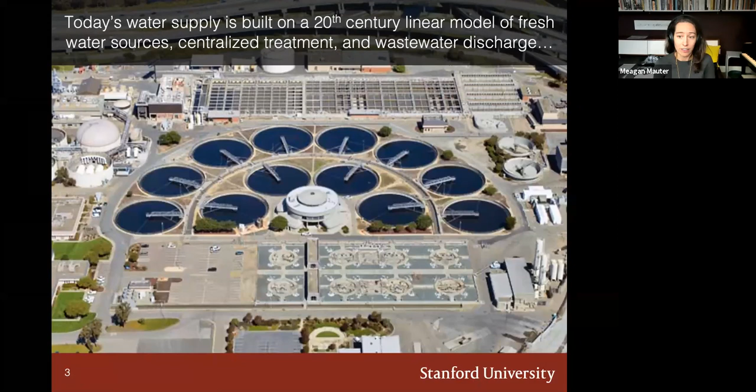Today's water supply is built on a 20th century linear model: accessing fresh water sources, large centralized treatment facilities leveraging economies of scale, and discharging wastewater with limited regulations and oversight. This model doesn't hold for the 21st century—we have large changes in precipitation patterns, increased water demand especially in urban environments, aging urban water infrastructure needing upgrading and replacement, and increasingly stringent regulatory limits on discharge. All of these factors are forcing water users toward non-traditional water sources and treatment methods.

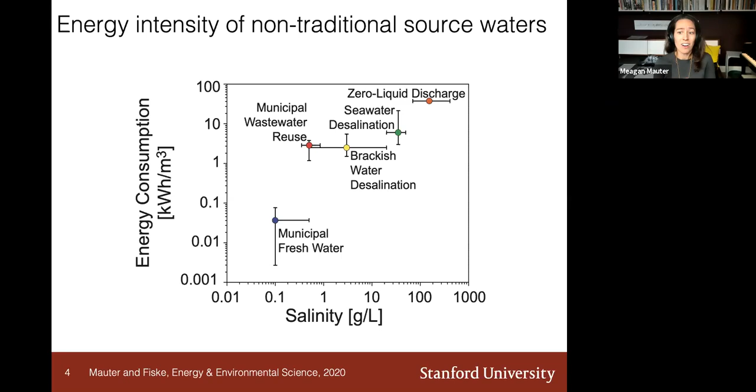Because water users are looking for low-cost sources, they tend to prefer sources with lower energy intensities of treatment—that is, lower salinity waters. So when augmenting municipal freshwater sources, we tend to see investments in municipal water reuse and brackish water desalination. But what's interesting is that municipal wastewater reuse and brackish water desalination are actually far less thermodynamically efficient than our processes for treating seawater.

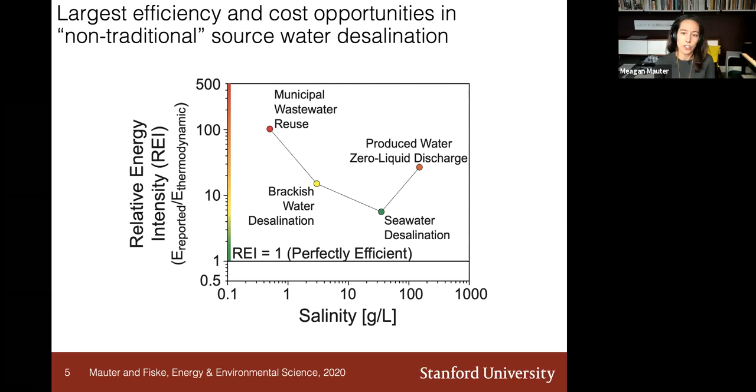We can replot these same sources with respect to their relative energy intensity of treatment—that is, energy intensity relative to the thermodynamic limit of treatment. What you see is that seawater desalination is actually one of the most efficient industrial separation processes, whereas there's a large opportunity for innovation in other non-traditional source water desalination at lower and higher salinity ranges. So NAWI's mission is to help water users cost-effectively tap these non-traditional sources, both by pursuing new sources like inland brackish water and by facilitating water reuse.

Ultimately, we seek to develop technologies that enable 90% of non-traditional water sources to achieve pipe parity. Translating this mission into an R&D portfolio really begins and ends with how we define and measure pipe parity. I want to dig into pipe parity for the water space a little more deeply here.

When we talk about pipe parity, the academic research community almost entirely focuses on the energy intensity of treatment—that's what I just presented to you. But the industrial research community, and quite frankly water users, are often far more focused on cost. So metrics for assessing cost become really important, especially for emerging technologies.

In our baselining activities preparing for the hub, and in our first year of activity, we also heard about the role of other pipe parity metrics and drivers for water reuse—things like regulatory discharge, or softer value propositions like drought resilience that a seawater desalination facility would provide to a city, or sustainability certifications an industrial manufacturer might realize by implementing water recycling on site. What we found is that there are often a large number of different determining factors, each of which affect a user's willingness to pay a premium for non-traditional water reuse.

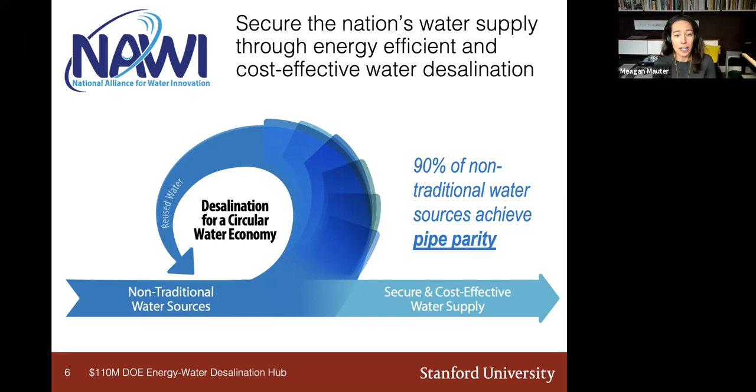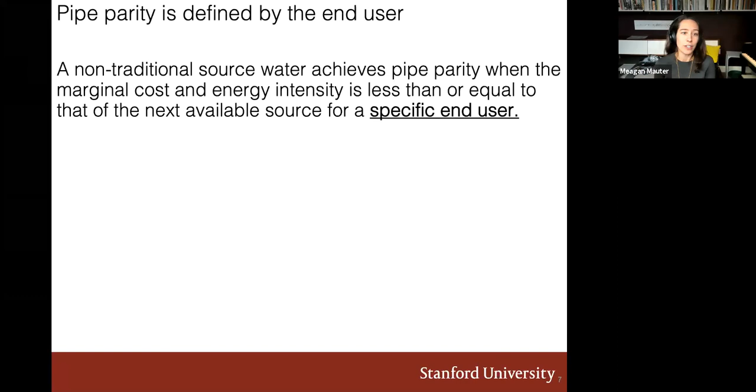Let me make this more concrete by offering up a definition for pipe parity. Of course, I'm going to start by saying pipe parity is defined by the end user. Our working definition acknowledges this reality by saying a non-traditional source water achieves pipe parity when the marginal cost and energy intensity, or other metrics, are less than or equal to the next available source for a specific end user.

We've looked at a lot of different end users in NAWI's baselining and road mapping activities during year one, including the power sector, the resource extraction sector, the industrial sector, the municipal sector, and the agricultural sector. We will also be highlighting in our road mapping and baselining activities the degree to which this is really geographically defined.

We see a lot of variation, and I think it's fun to be here in the Third Coast seminar series because so much of the desalination focus has actually been inland in the West, in places like California, Arizona, and New Mexico—arid, desert regions. But it's equally applicable in other geographic areas where we might not think about being short on water supply, but we see other drivers encouraging water reuse. I will say that across these water users, there is actually a common set of technical barriers to cost-effectively tapping those non-traditional water supplies.

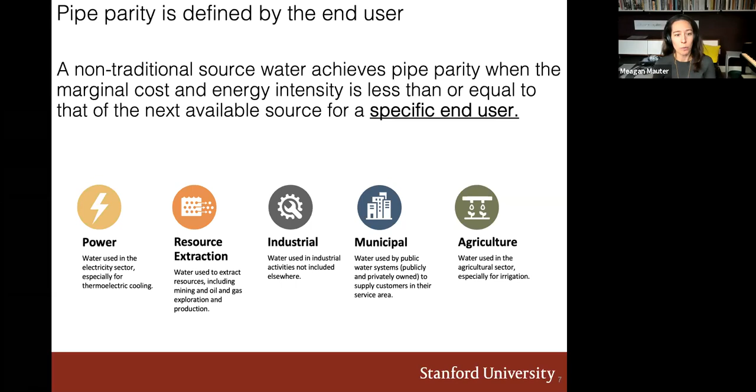I'll come back to what those technical barriers are in just a second. The other important definitional aspect to pipe parity is that it must be defined on the margin, which means it is defined instantaneously and in a location-specific manner.

A non-traditional source water like wastewater is never going to have the same cost or energy intensity as fresh surface water—we know that. But for a municipality like Orange County that needs to augment limited supply, wastewater reuse may very well be the next lowest cost source. So on the margin, it is cost competitive.

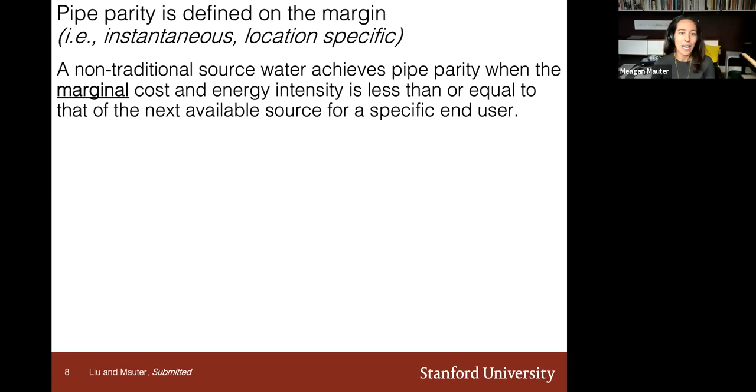Determining what this next lowest cost source is also means we need to look beyond just treatment to consider the full life cycle cost of water. We've done a lot of work in our group to look at the energy embedded in water transmission—conveying water from the source to the treatment facility—understanding the energy intensity of treatment with high resolution, and then also quantifying the energy intensity of distributing water from the treatment facility to the consumer.

In one example, we've looked at a network of 330 different consumer nodes and quantified the relative energy intensity of this entire process, moving from the source to the consumer for each of these water users. We observed three things in doing this. The first is that there's a wide range of energy intensity for delivering water to different consumers.

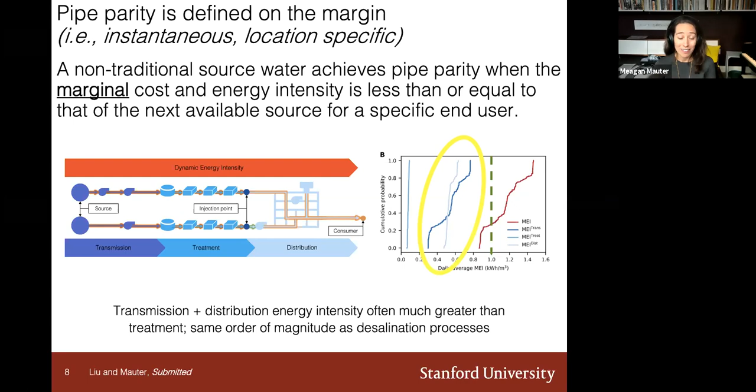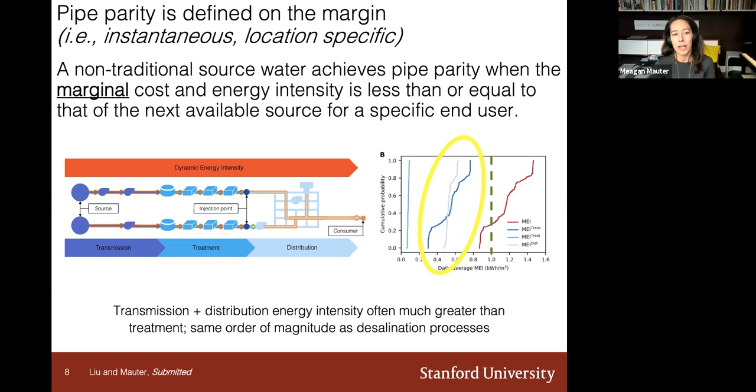The third takeaway here is that transmission and distribution energy intensity are often much greater than the energy intensity of treatment for overall municipal systems. They happen to be on the same order of magnitude as these desalination processes I just mentioned. This really underscores the fact that there are large opportunities to think differently about the way we might augment future water supplies.

In NAWI, we really relied on this quantification work to inform hypotheses about the relationships between treatment costs, transport costs, and total costs when defining the levelized cost of water. Our initial hypothesis was that the most viable pathway for reducing the cost of non-traditional water sources would be to replace the economies of scale we tend to see in water treatment, where we see much lower cost water treatment at higher operational scales.

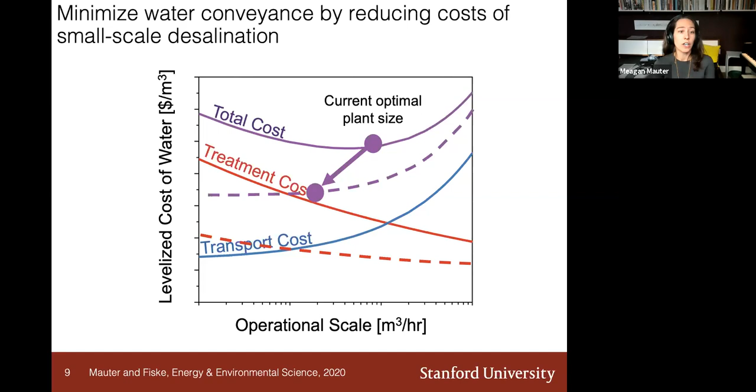We wanted to replace that with economies of scale in manufacturing, essentially lowering the cost of small scale distributed treatment systems through manufacturing innovations, and that this would reduce the overall cost of water by basically minimizing or eliminating the cost of water transport. So this is kind of our grand vision for NAWI, and one of the next steps was really to define what the technical needs were to realize these small scale distributed systems.

We identified 6 different technical needs that we thought were going to be critical. The first is autonomous operation, so an ability to operate these small scale systems without as many on-site operators, and also to leverage advanced models to help us work in a more efficient, both thermodynamically efficient and cost-efficient manner.

The second innovation need is in precision separations. We want to be able to remove contaminants of concern without over-treating the water. Most of the time, this involves trying to move away from bulk separation processes when a trace contaminant is what's driving that particular separations need.

The third area is a need for resilient treatment systems. In particular, in small scale systems, we expect to see much greater fluctuation in water quality. So we're going to need systems that can really respond to this fluctuation without failing, without fouling, without scaling, et cetera.

The fourth area is intensified brine management. I'm going to spend a lot of time on this in today's seminar, but essentially brine or concentrate management from desalination systems is often a real limiting factor in our ability to deploy inland water desal, and so is going to be very important as we move forward with this paradigm.

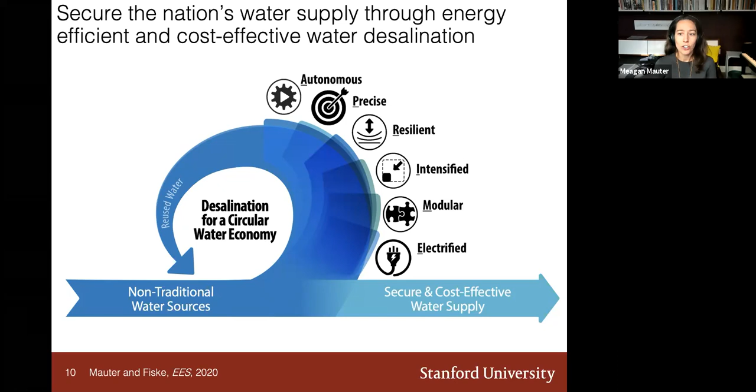The fifth area is modular, really leveraging these economies of scale in manufacturing to reduce the costs of both pretreatment and desalination systems. And then finally, process electrification, moving away from chemically intensive processes that are difficult to stock and store on site to electrically driven processes, and also using water treatment systems themselves to provide services back to the electricity grid.

So across these 6 challenge areas, we're able to distill this kind of set of core research needs that would benefit all of the 5 water user groups that I previously mentioned.

But I'll also say that as a funding organization, we're also facing a larger and slightly more existential question about how to distill some of these challenge area questions down to very specific innovation needs that are going to most quickly deliver lower cost desalination systems.

I'll say this is really a universal challenge. It's a challenge for academic researchers looking for new R&D projects. It's a challenge for industrial component manufacturers trying to stay competitive in their marketplaces. And it's a challenge for municipalities trying to figure out when it's worth adopting a new technology platform or when it's worth waiting a little bit longer to see what comes out next.

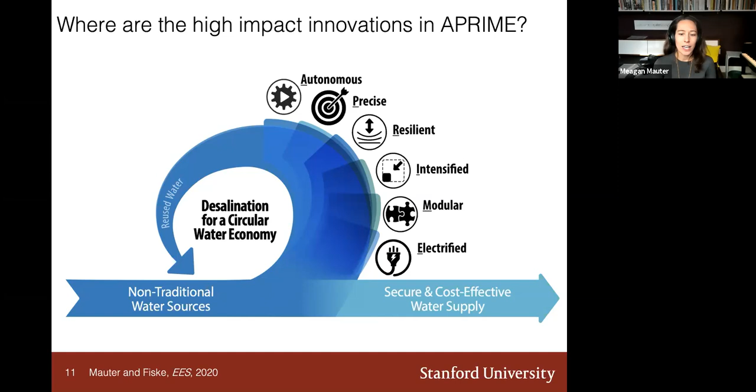The reality is that as a community, as a water community especially, we really lack good tools for evaluating the value of innovation. So today's talk is going to focus on a suite of approaches we've been developing in my group and alongside my group within NAWI to really look at this universal question. I'm going to do this by using intensified brine management as a model.

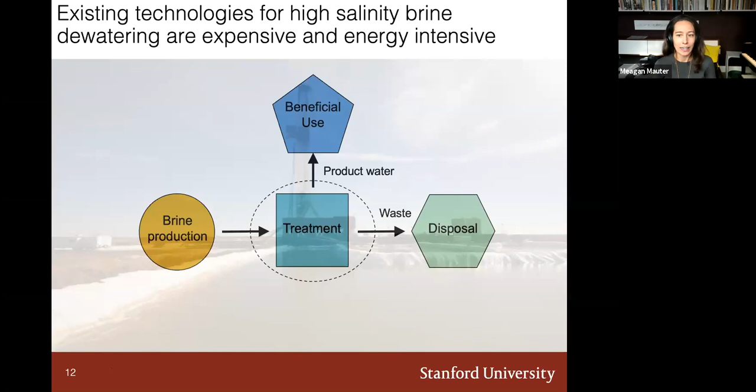So we start with a high level problem, which is that we don't end up recovering much product water from brines because existing technologies for high salinity brine dewatering are expensive and energy intensive. And so as a result, we incur very, very high disposal costs.

The next step is really to figure out what are the technologies used today and why are they so expensive. So we can start with this baselining question of trying to understand what is the cost and energy intensity of reverse osmosis, which is the state-of-the-art technology for concentrating brines up to about 75 grams per liter, and mechanical vapor compression, which is the most energy efficient thermal approach for desalination of high salinity brines at this higher salinity from about 75 up to about 250 grams per liter TDS.

So what we find right off the bat is that while reverse osmosis is incredibly energy efficient, mechanical vapor compression, because it involves the first order phase transition, uses 5 to 10 times more energy and is 3 to 10 times more expensive than seawater reverse osmosis.

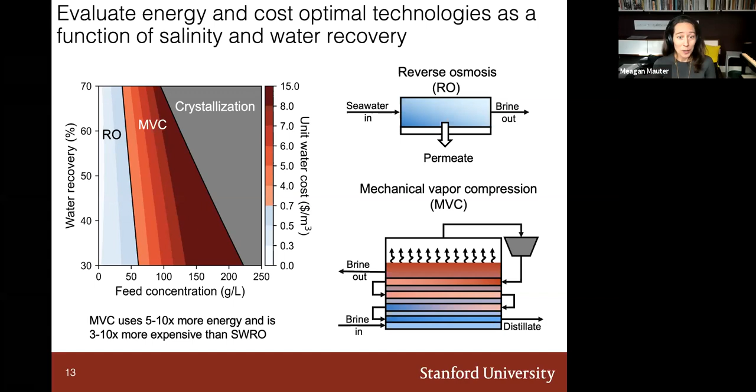The next question is really, okay, what are the alternatives? We're interested in evaluating both the cost and energy benefits of emerging technologies. In this case, I'm going to highlight 3 modular membrane technologies because that falls within the paradigm of really trying to move ourselves toward modularity and membrane-based systems. But this is by no means a comprehensive list of different approaches.

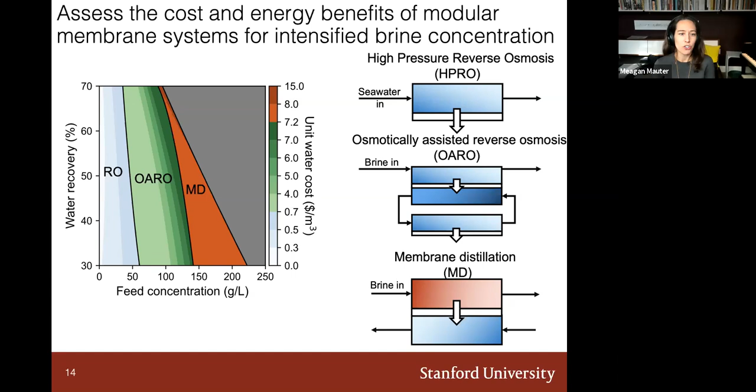The first one I want to highlight is high pressure reverse osmosis. In high pressure RO, you are simply extending the pressure range of existing reverse osmosis systems. Today's RO systems are limited by the pressure tolerance or the burst pressure of our membrane modules, which is typically somewhere between 65 and 85 bar. The issue is that the driving force for water flux is the difference between this change in applied pressure across the membrane and the salinity across the membrane.

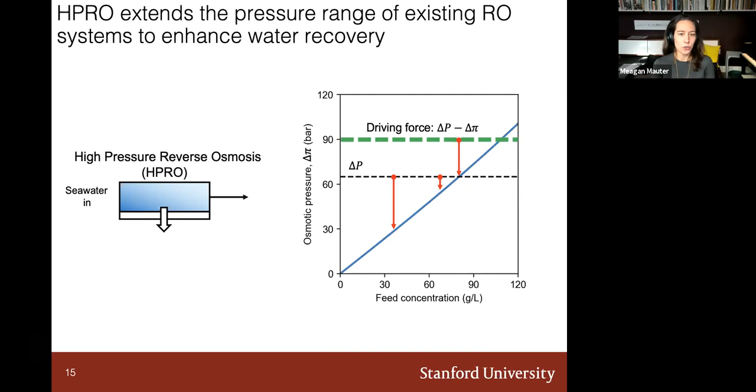So one approach in high pressure reverse osmosis is simply to raise the burst pressure of the membranes. If we were to do that up to 90 or 125 or even 300 bar, you could really enhance the recovery of existing reverse osmosis systems. In fact, I think your last Third Coast seminar series speaker, Menachem Elimelech, who is also my PhD advisor, did a lot of work in quantifying the value, the energy benefits of high pressure reverse osmosis.

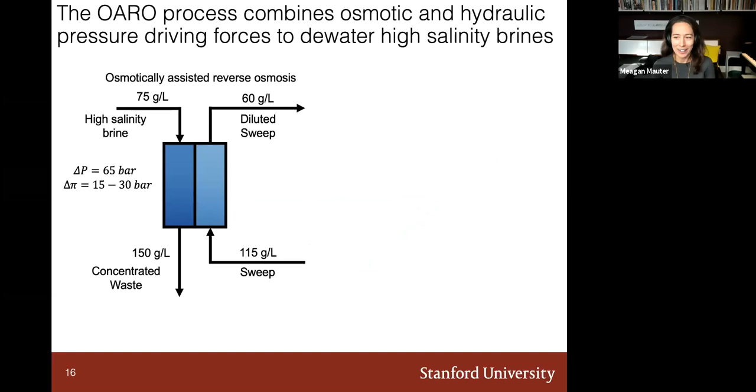Another approach is to address this kind of separation at higher salinities by reducing the osmotic pressure difference across the membrane. So in osmotically assisted reverse osmosis, we introduce a saline sweep, which allows us to drive water flux for high salinities at operating pressures typical of today's membrane modules. The issue is that this diluted sweep is not actually a useful product. So we need to perform several separation steps. Basically, you introduce a second stage and then a third stage until you can produce a water that can be effectively treated using standard reverse osmosis.

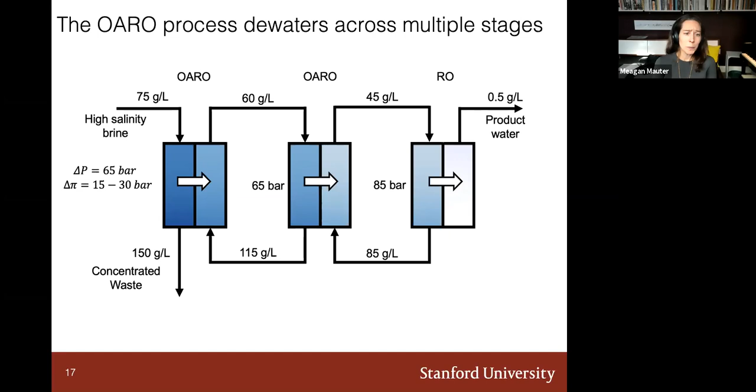So we were really excited about proposing the osmotically assisted reverse osmosis process back in 2017. There's also some parallel efforts by Gradient doing really nice work in commercializing this technology. But we evaluated the energy savings of deploying osmotically assisted RO, and we're really excited about the potential benefits relative to MVC, which is plotted by the triangles, and osmotically assisted reverse osmosis, which is plotted by these black dots. And that's great, but one of the things we realized as we were exploring the system is that our energy optimal configuration had really, really high costs.

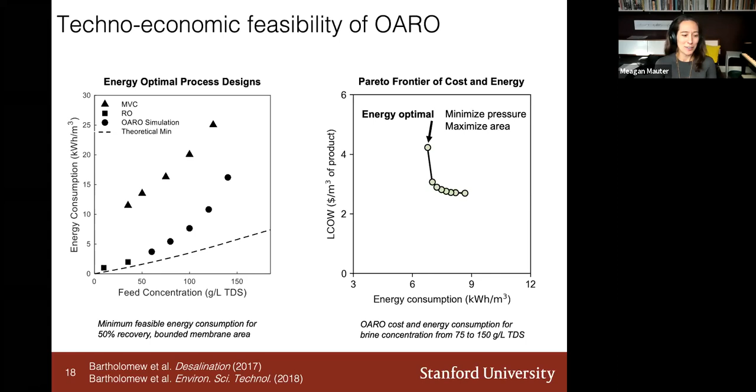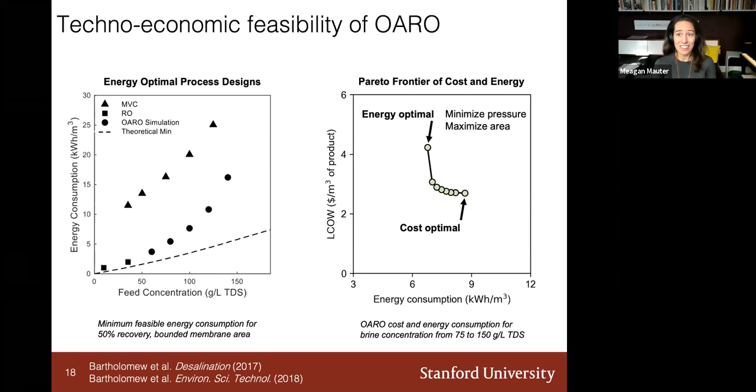Optimizing the energy intensity of any membrane system is somewhat trivial. You just maximize the membrane area because you're reducing the osmotic pressure difference across the membrane, so you can operate more efficiently. But we can't afford to build those systems. So the cost optimal system is actually the system that has much higher energy intensities for separation. An underlying issue behind all of this is that it's actually pretty hard to figure out what that cost optimal design is. In osmotically assisted reverse osmosis, we have 6 decision variables per stage that we are adjusting, so evaluating this parametrically is really close to impossible.

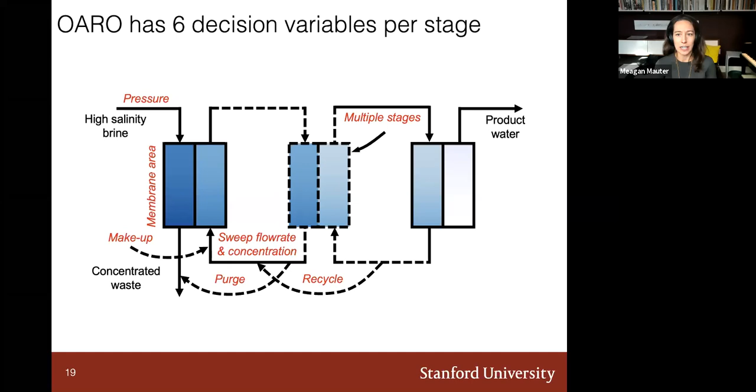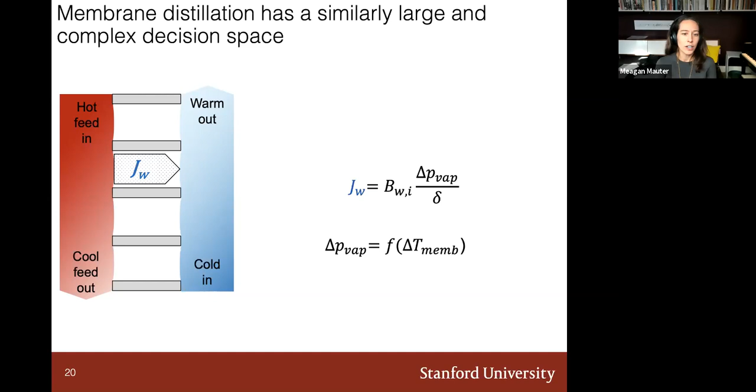The final technology that we've done a lot of work on as a group is membrane distillation. And if you thought osmotically assisted RO was complicated, well, welcome to MD. Membrane distillation is, at its core, a technology that uses a difference in vapor pressure to drive vapor transport across the membrane. You have evaporation on the feed water interface, or the hot side, and then condensation on the cold side, and it's this difference in vapor pressure that drives flux.

But when we think about actually building out MD systems, we often see many different gap types. We see lots of different process configurations and then tremendously different superstructures. All of this to say that it is absolutely a non-trivial challenge to estimate the current costs of an OARO or an MD system, because this design space is so large.

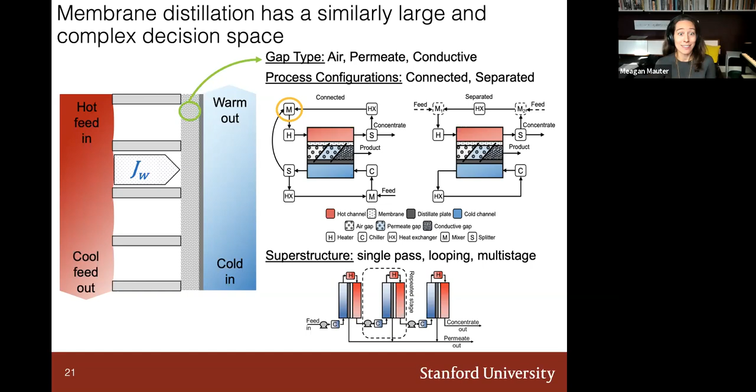It's even more difficult to figure out what innovations are going to substantially lower these costs. So we finally took a step back from new process development to really focus on what are the tools that we need to help us make sense of this research and development space.

One way we've found to overcome the first challenge is to use process-based optimization models to rigorously explore the design space. So instead of looking at each combination of decision variables manually, we simply specify the salinity of the incoming feed water and the desired water recovery. Then we specify the performance of each system component and the associated costs, including things like membrane permeability, the cost of energy, the cost of financing, et cetera. So we have a pretty simple set of inputs to these cost optimization models.

The process-based optimization model itself searches for the system configurations that minimize the levelized cost of water, or the CapEx and OpEx amortized over the lifespan of the plant, to produce a specific system design. It specifies all of the devices and components, the flow rates, the pressures, et cetera. And it gives you the system design, the operating metrics, and finally the system costs.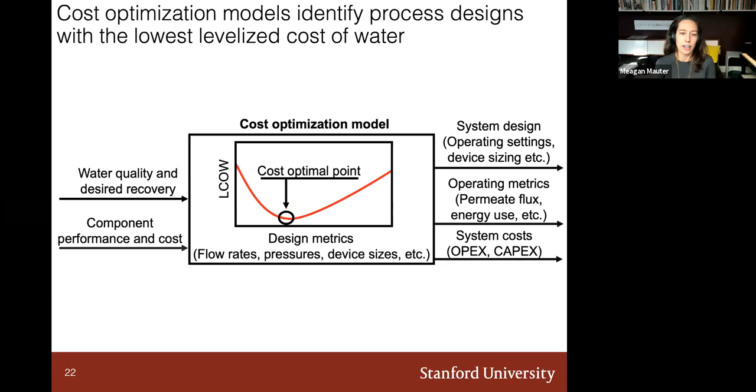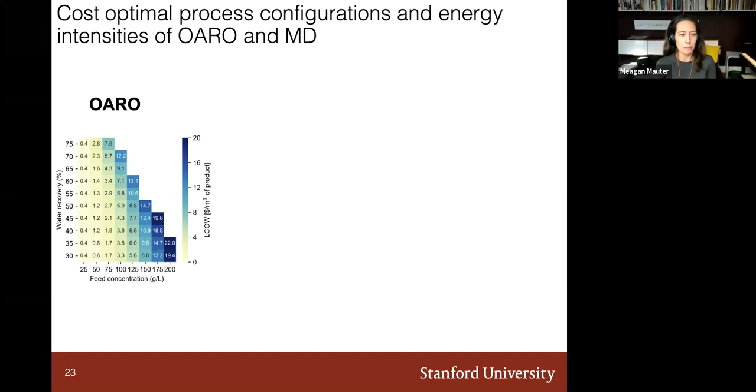We've been able to apply this to osmotically assisted reverse osmosis as shown here. We have the feed concentration on the x-axis and the water recovery on the y-axis, while the levelized cost of water is plotted as a color gradient. There are very, very different system designs for each of these cases, but I've given you the cost optimal system design and the associated price.

We can now compare this in an apples to apples way with other emerging technologies for high salinity brine treatment, things like looping membrane distillation and multi-stage membrane distillation. This allows us to start to assess which emerging technology is going to perform best in which salinity range. You can see that osmotically assisted reverse osmosis, with this lighter yellow color, is going to perform much better than the other two technologies in this 75 gram per liter range, 50% recovery. It is much, much better.

It also helps us understand whether there are technologies that are just never going to make sense or are unlikely to ever be cost competitive. In this case, you see very quickly that looping MD is always more expensive than multi-stage MD, and that's really a function of the way heat is recovered in looping MD relative to multi-stage MD. So this is really helpful in saying, hey, I don't want to spend any more of my postdoc's effort building looping MD systems. Let's quickly move on and just focus on multi-stage designs.

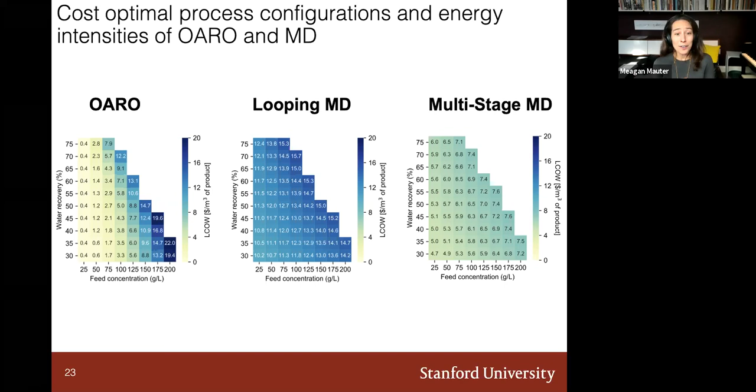The other thing we can do with optimization models is conduct sensitivity analysis on the effects of improving component performance. So we can look at this relationship between component performance and the levelized cost of water for the entire system. This is especially important because membrane systems are really complex assemblies of many different components, and these components all interact with one another.

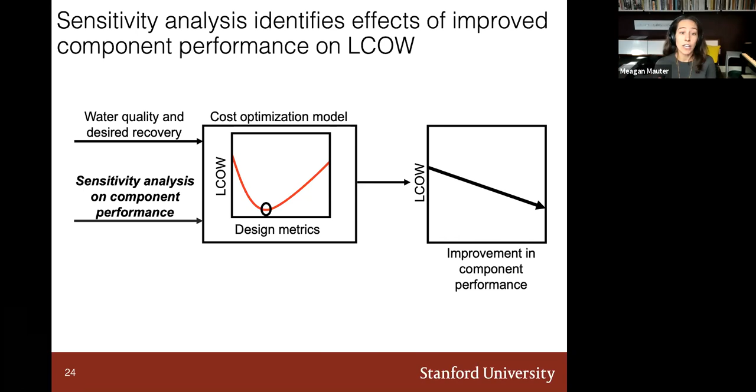So we can't simply assume a static relationship between the components and the systems. Instead, what we do is parametrically vary component performance, and then let the optimization model search for that re-optimized system design. We can say, okay, as we improve component X, our levelized cost of water is going to come down by this much. We've done this again for osmotically assisted reverse osmosis. Here I'm showing the effects of doubling the pure water permeability coefficient of a membrane. What we see is that if we double that A parameter, we can decrease the cost of osmotically assisted reverse osmosis by 5 to 10%, depending on the feed water salinity.

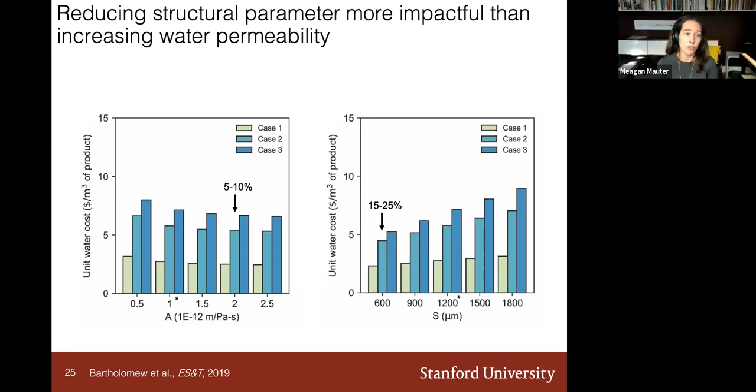In contrast, we can ask what happens if we change the structural parameter of our membrane, if we take it from 1200 to 600. Here we see a 15 to 25% cost reduction. This helps us understand that R&D activities focused on reducing structural parameters are going to be more impactful than those focused on increasing water permeability.

But the issue with this approach is that it naively assumes that increasing component or improving component performance does not increase component costs. So a more sophisticated variant of this analysis would perform coupled sensitivity analysis on component performance and costs at the same time.

So for an increase in performance, we'd specify an associated increase in component costs based on what's available in terms of different component availabilities or a cost curve for a component. And then again, let the optimization model select the cost optimal design and operating parameters.

This would produce a three-dimensional map that related cost and performance of the component to the levelized cost of the membrane system—the levelized cost of water for the entire system based on component cost and performance. An interesting feature of this analysis is that it identifies the relationship between component cost and component performance that yields an identical system LCOW.

So you'll see in this white line here, I'm plotting a single line that traces an identical levelized cost of water across a range of component performance and costs. And we call this the isocost curve.

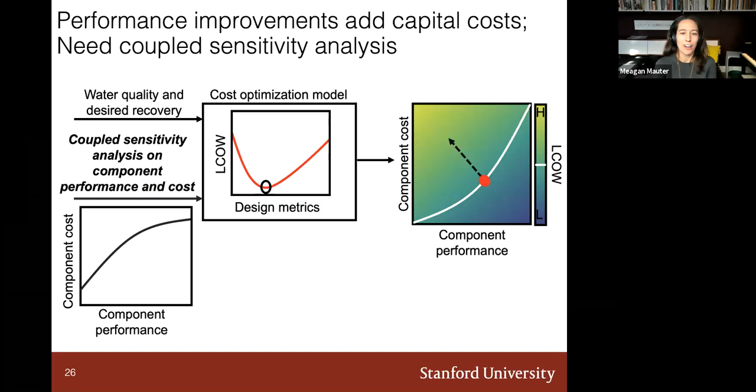Okay, so the arrow on that plot should have gone in the other direction. I'm so sorry, minor detail.

So these isocost curves could be really helpful in informing high impact innovation trajectories for lowering the overall system costs of water. When we have curves that are a little bit more vertical, this suggests that only component cost reductions are going to reduce the levelized cost of water for the system.

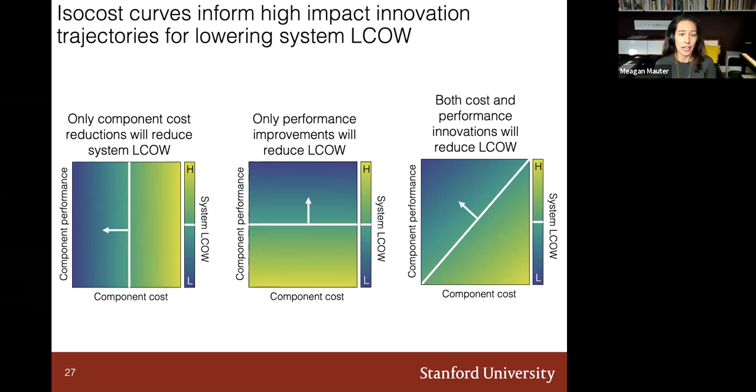In contrast, if our isocost curves are horizontal, it suggests that only performance improvements are going to reduce the costs of water. And finally, if we have more complex functions, we're really looking for the direction that's normal to that isocost curve to yield the highest impact on the levelized cost of water.

So let me relate this back to our example of structural parameters in our membrane systems. You'll see here that we previously suggested that by halving the structural parameter of the membrane, we could significantly reduce these system costs. And that's true if you have no change in component costs.

But the issue is that if you expect the membrane to cost you more, then you may actually see a component cost change. So what this map tells us is that you should only focus on halving the structural parameter if the associated increase in membrane costs is less than 40%. So anything less than 40%, good to go, you're making an impact. Anything more than 40%, you're actually losing ground.

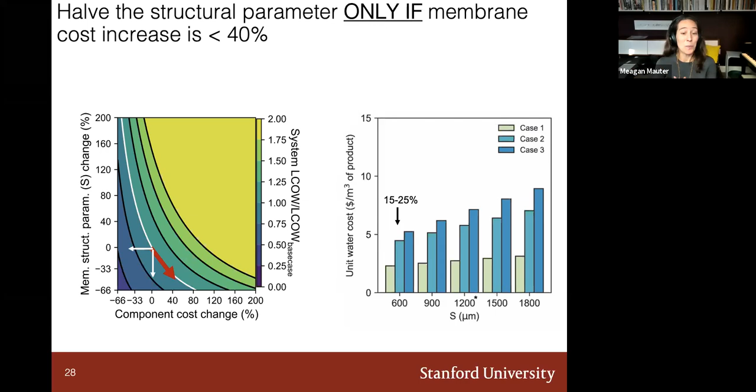The other thing that this can help us realize is that focusing on the cost of the membrane would be far more impactful than trying to reduce the cost of the structural parameter. So it really helps us get at where we might want to invest our R&D dollars.

And in fact, we're going to be using some of these cost curves to help us figure out where to invest R&D dollars within our NAWI research portfolio. Because these are unique to each process and device, it certainly requires good models of these systems, and I'll get to that again a little bit at the end of my talk.

But this is a quick overview of the isocost curves for osmotically assisted RO and multi-stage MD processes that we've worked to develop so far.

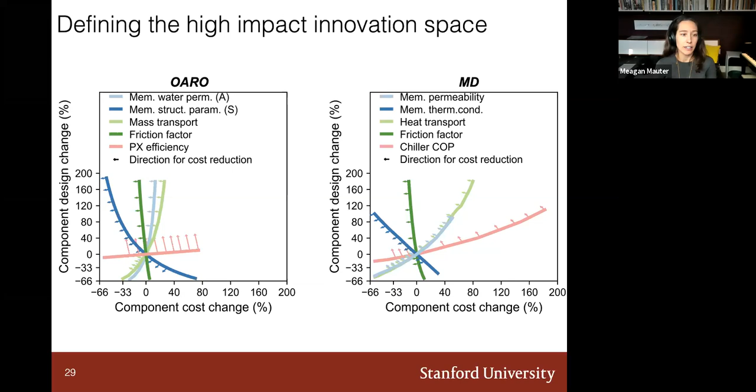I guess I'd just point out too that you consistently see a lot of nonlinearity in these curves, and you also see quite a bit of variation in the magnitude of cost reduction for each. So the larger arrows in these plots indicate the potential for larger reductions in the levelized cost of water.

So I've talked a lot about how we can improve component performance or reduce component costs to move us to an improved isocost curve. But I haven't really talked about the potential value of diversification of components.

So a question that we've also started to look at is what happens if you can't really overcome that isocost curve? Is there still value in diversifying the set of components along that curve? And I believe that the answer is yes, mostly because it provides a lever for us to influence the relative ratio of capital expenses to operational expenses in the system.

So this isocost curve can also be mapped onto this percent of system OPEX, or that ratio of OPEX to total levelized cost of water.

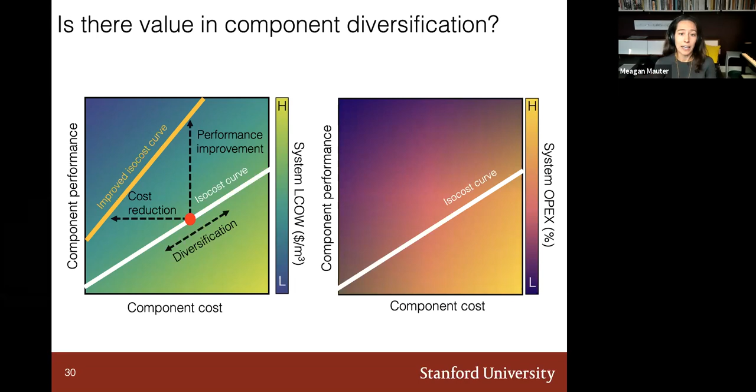I have an example here of pump efficiency change in osmotically assisted reverse osmosis, and what we can see is pretty significant tuning of that ratio of CapEx to OPEX costs for even a single component in a system.

That's valuable because oftentimes we aren't designing systems that have well-defined lifespans, or there's a probability that our system's going to be decommissioned early. So we might prefer to have higher operational expenses relative to capital expenses.

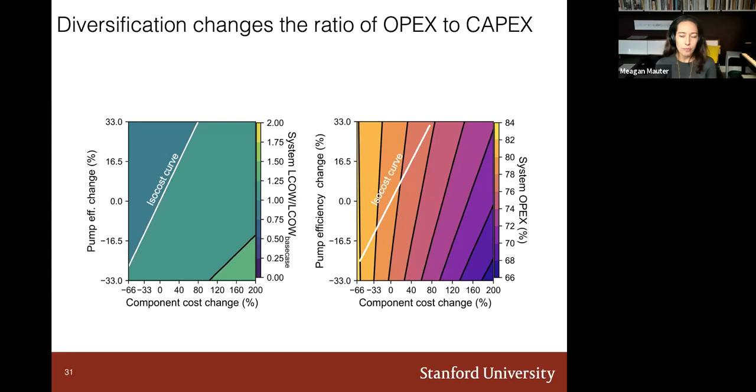The final thing that's really important in understanding how to perform analyses on membrane systems is that there's a lot of uncertainty in the future costs of components, especially for emerging technologies, or in the relationship between cost and performance. We just don't know most of the time. So when we're trying to understand the value of innovation for component A versus its performance, we need to acknowledge there's a lot of uncertainty, a lot of distribution here.

The second thing that's really important to understand is that there's oftentimes simultaneous component innovation. So our component A will be improving, and at the same time other components in the system may be improving—either because you've invested in that improvement, or because there's spillover effects from other fields, where advanced manufacturing techniques in heat exchanger systems in power plants get translated into advanced manufacturing approaches for heat exchanger systems in water treatment systems. So the value of innovation for the first component is actually affected by the level of performance in the second component.

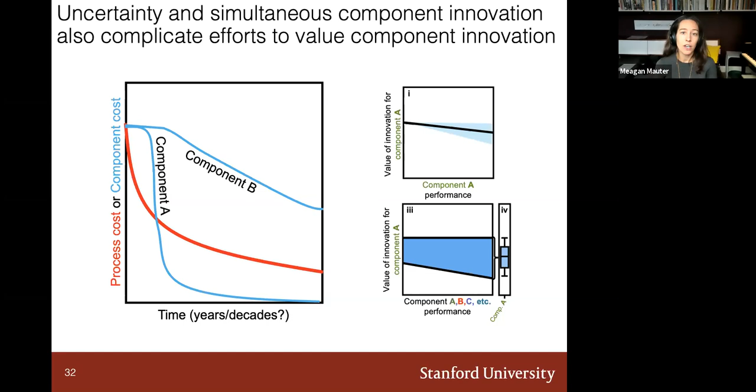So we've done a lot of work in the past couple of months developing something we call the stochastic value of innovation analysis. I'm going into a little bit of the nitty-gritty here, but at a high level, what we do is evaluate the effects of improving the performance or reducing the costs of a component parametrically, but in a Monte Carlo based environment.

So we establish a range of performance cost parameters and use the Monte Carlo method to sample a reference case. We then improve that reference case by a set amount to value innovation. This X is defined in a couple of different ways in our system. We can look at a case in which there's no cost penalty—that's the same as doing a statistically based parametric analysis.

In another case, we increase the performance but also increase the cost. In a third case, we increase the performance by 1% and decrease the cost by 1%. So this one's going to be really good.

And then in a fourth case, we actually translate this isocost curve up. It's a kind of proxy for what an actual component cost curve might be, even though we don't have actual component cost curves to test here. In theory, if we translate this isocost curve based on where this Monte Carlo step has taken us, we should see a distribution centered around zero if this translation is fully valid. If it's not fully valid, then we know our isocost curve isn't consistent in those other ranges.

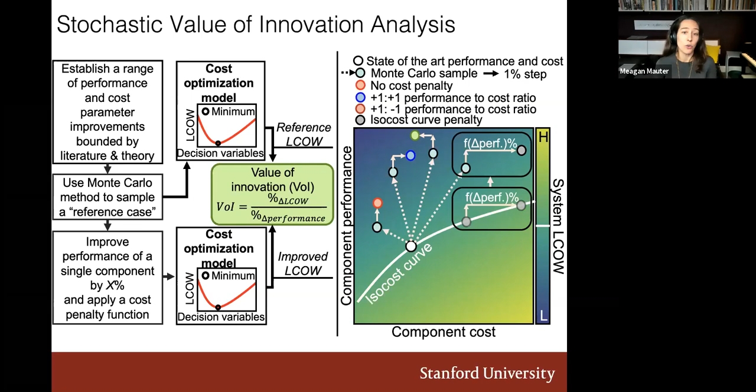You'll see there's a variation when we apply these different techniques to osmotically assisted reverse osmosis. So the idea is we're looking for distributions that have high impact—when you increase performance by 1%, you also improve the levelized cost of water by 1%. But you're also looking for cases with a narrow distribution, because that suggests high certainty that this improvement will actually make a difference, even in the face of innovation and improvements in other components.

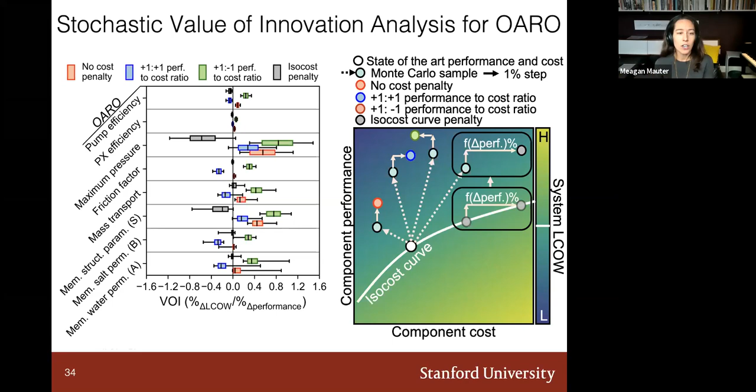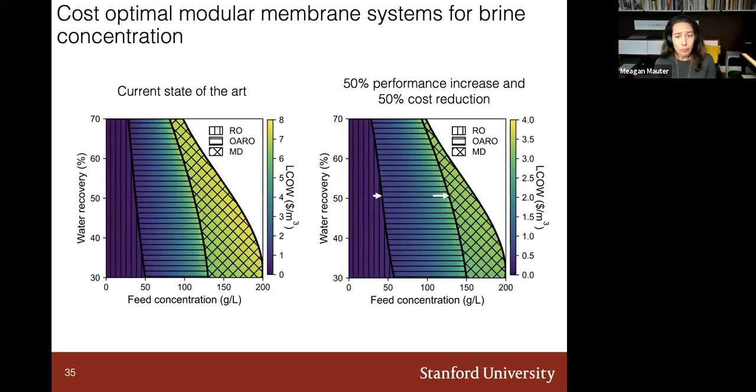I will say too that I've sort of put high pressure reverse osmosis aside, but we've also incorporated that into our analysis and found that HPRO fully displaces osmotically assisted RO if we can manufacture a membrane with seawater level A and B parameters and costs at 300 bar.

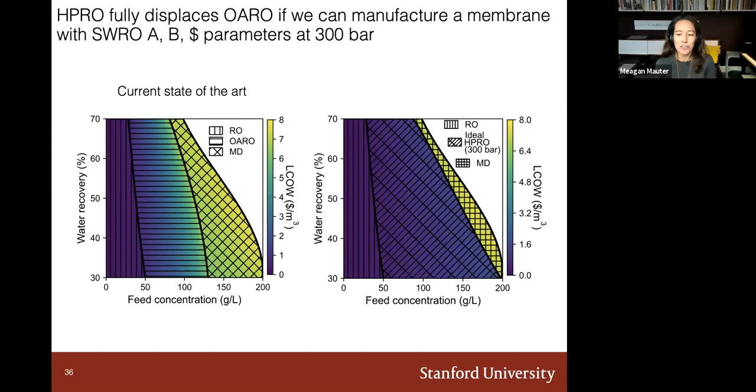The issue is that from a materials science perspective, this is going to be really difficult in practice. So we have everything from membrane compression that changes transport properties to new permeate collection approaches that are likely to change module costs. And so it can be quite difficult to really get at

what level of cost changes are going to keep high pressure reverse osmosis cost competitive relative to ideal OARO or MD technologies. What we found here, in an effort to probe the effects of cost changes only, is that we basically look at the cost multiplier of the high pressure components and do a willingness to pay analysis. What we find is that if you maintain performance, using high pressure reverse osmosis is beneficial so long as your cost multiplier stays at the lower end of this range, whereas it becomes less advantageous relative to MD and OARO if that cost multiplier increases.

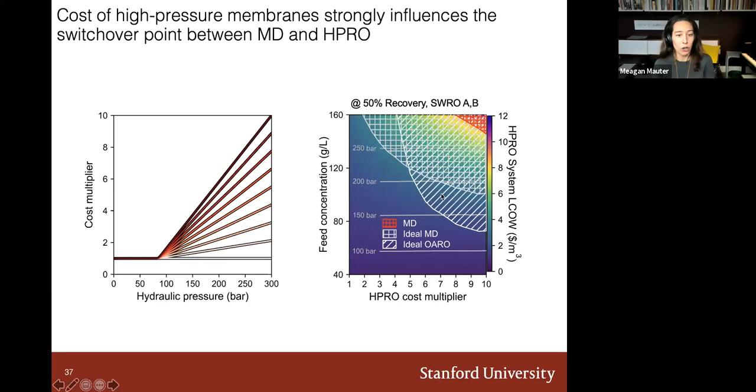I don't want to go into too much more detail here, but I do want to say that a big goal of NAWI is to make these tools open source for the water research community. And I'm happy to answer any questions that you have about the set of model libraries and simulation and optimization tools that we're developing within the NAWI research community to help the water treatment community benefit from this type of analysis.

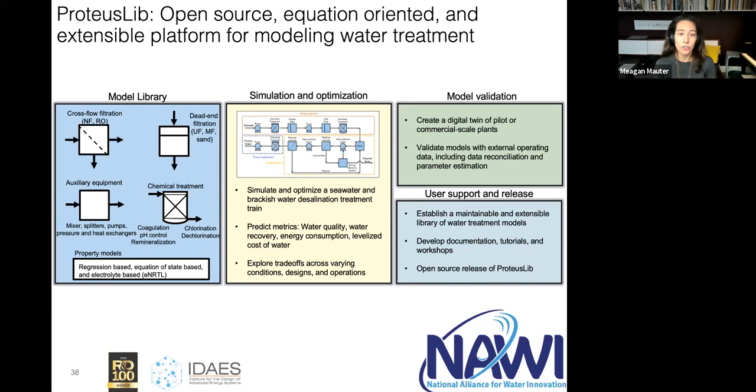In conclusion, I believe that analysis-driven research is going to be critical to identifying these high-impact innovation opportunities. Membrane processes are really complex assemblies of coupled components, and so we need high process-level fidelity. We also need system models that are readily fit into optimization algorithms and can help really be deployed to understand the relative value and utility of emerging technologies and focus our R&D efforts in productive directions.

I'll just say to conclude that all of this cost analysis is really going to benefit from closer collaboration between researchers and industrial manufacturers that have a lot of insight into the actual cost performance curves for many of these systems. So with that, I want to end and take questions, and Lamia, I'll turn it back over to you.

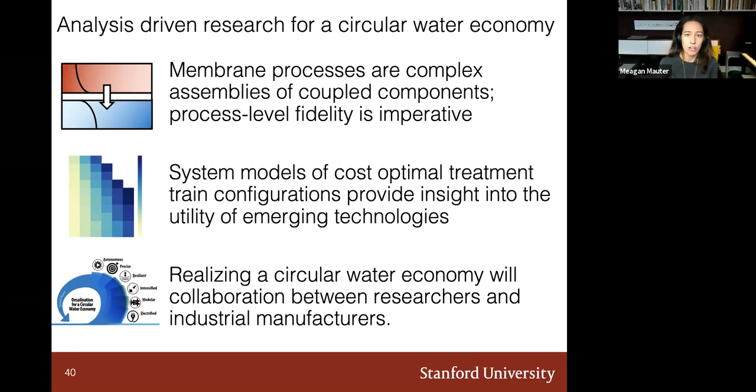And I think we're seeing that, right? Like the Department of Energy has really stepped in as a leader in the R&D space for water, both through a number of the centers out of Argonne and Northwestern and other places, as well as through the hub. And we are also seeing some work out of AMO at an even higher TRL range, kind of the TRL 4 to 6 to 8 range, where the piloting efforts and demonstration efforts help to further de-risk these new technologies for the industrial end user.

Great, well it certainly will make, I hope, our federal R&D investors more confident knowing that you've got this great model to help identify where we can best spend those scarce and hopefully growing investment dollars. So I'm going to wrap it there, and thank you so much for this presentation. We really look forward to following the work. It was, again, such a great fit for the Third Coast community. So thanks for being with us.